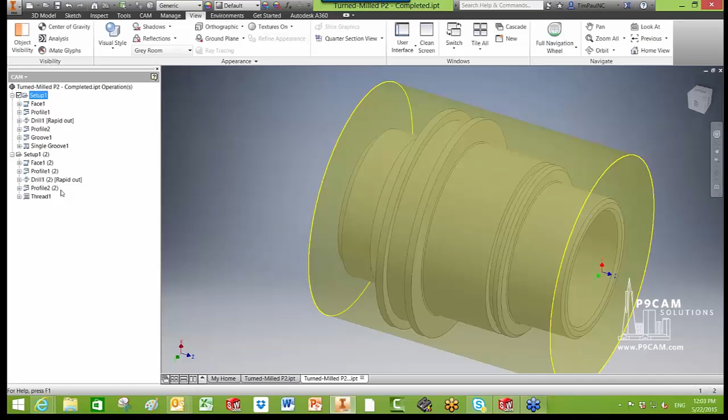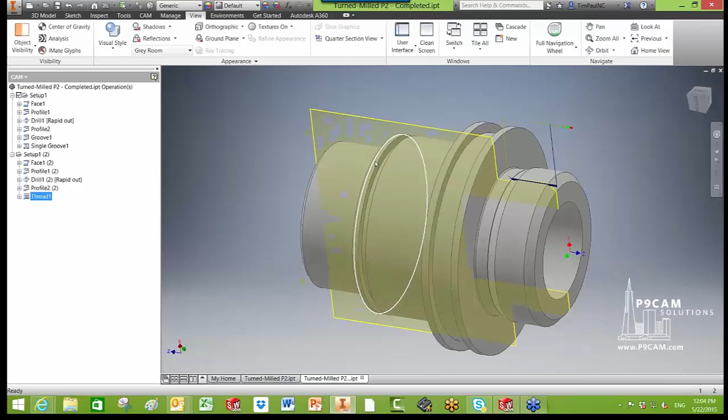So real quickly, I'll give you a quick overview of what we're going to do, and then I'll jump over and we'll work through the actual part. We're just going to do a pretty typical lathe profile, drill, bore, and then I'll show you a couple different ways to do some grooving. We'll get over to the second operation, and we'll show you how to do the same thing, but also add a threading there. So the first operation, I'm going to turn it past the shoulder, and then we'll flip it over, grab it in some jaws, and do the second operation.

So with that said, let's jump over to this part, and we'll jump right into it.

The first thing we're going to do is come up to the setup here. If you're in the model, you jump over to the CAM, and you come up and set up the part. So we're going to set up the first operation and work through these questions. The normal tabs, you just start here and go over and answer the questions you need to answer. We're going to start by selecting turning as our job. We're going to have it in the primary spindle, and we look out, and the gnomon's kind of where we want it. So the work coordinate system is centered, and the Z is facing the direction we want. If we wanted to flip that, we can just hit this and flip it over to the other side. For now, we're going to leave it because it's where we want it.

Then I'm going to come down here to the model and select that so it knows this is what we want to end up with when we're all done. I'm going to come to the stock tab here, and it defaulted to fixed size cylinder, which is actually what I wanted, but you can see there's a lot of other options. I know the bar stock that I have is 3 3/4 diameter, and I want to start with, let's say, 4 1/4. If we wanted to position this offset from front, center, or back, we could do that too. I'm going to leave it on center.

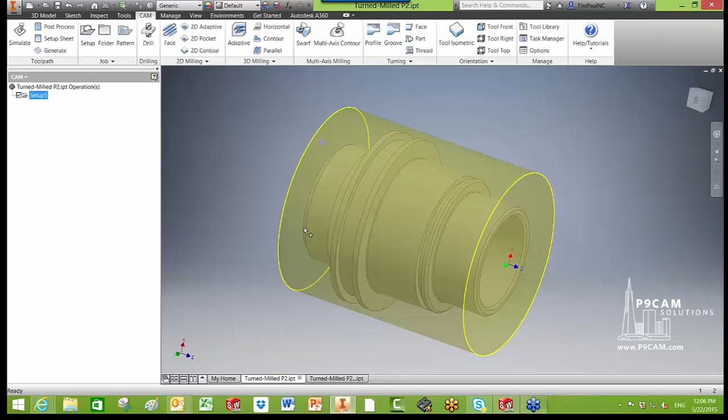Now we're ready to start cutting. If you click here, it shows you your stock. You have some extra material here, some extra material to cut off the front. So generally I'm going to come in and face the front off first. You could come up to turning and grab the tools out of here. I've gotten into the habit of just right-clicking in this gray space and doing a new operation, turning operation, face. If you guys hear me talk much, you'll notice that I count my mouse clicks and try to reduce my mouse movement as much as possible. So that's a good little efficiency trick. I'm going to click on face.

Same thing with these 5 tabs, you just got to go through and answer some basic questions. I think about it as wanting to answer the least amount of questions. So we're going to grab a tool. Here's the tools I have in this library. I'm going to grab this one, that's going to be a good face tool. I'll hit select. You can see it's already coming down, doing a one pass. I want to do some multiple passes, let's say 3 passes at 30 thou.

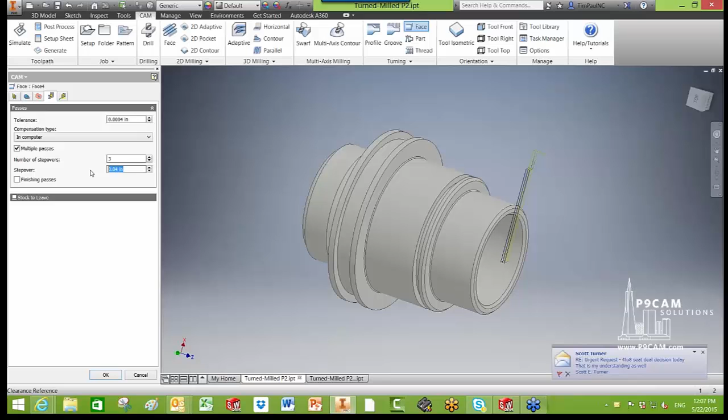Let's do a finish pass too, at 10 thousandths, and hit OK. Like I was saying before, I try to get as few questions as possible, so you can see I didn't go through all the tabs. I start with, like Derek always says, throw the toolpath out there and see if you like it. That's exactly what I wanted right there - a few passes and a finished pass.

So the next thing we're going to do is profile the outside, and I want to profile it a little past that flange. I'm going to right-click, New Operation. Actually, I'm going to close out my Outlook here real quick, I think I just saw a pop-up.

So I'm going to do new operation, a turning operation in profile. I think I want to use that same tool, so it auto-selected the last tool I had. I'm just going to hit OK and see if that gets me what I want. Actually, I know it's not, but I wanted to show you, kind of back into it. I didn't want to go all the way here, and I don't want it to try to groove these, so I'll show you how to get rid of that.

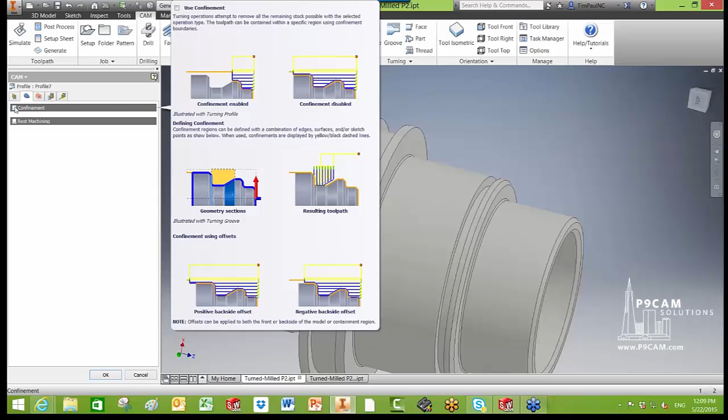We'll go back in, right-click and edit on that profile. Right here where it says Allow Grooving on your tool tab, we're going to get rid of that, so it's not going to let it come down into these grooves. I also want to set a confinement - if you hover over this it'll explain what a confinement is. I'm going to click on that and tell it I want to machine from that face to that face. Like I said earlier, I actually want it to machine, say, 100 thou past the back, so I'll type 100.

Let me see if I have any questions coming in here. Okay, so I'm going to hit OK there, and that's what I wanted. I didn't want it to dip into here, I wanted it to machine past there.

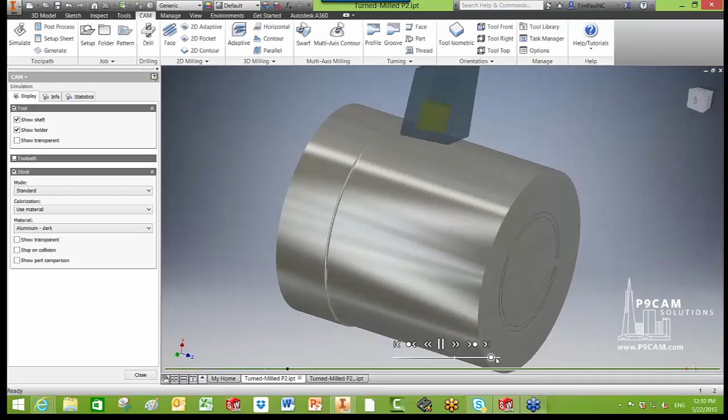So now's probably a good time to do a first simulation, make sure we're on track. I'm going to do simulate. You can turn on your stock - I like to use material, looks nicer. We'll speed that up, just kind of make sure that's what we want to get. So that looks like the part that I want, so I'm going to hit OK.

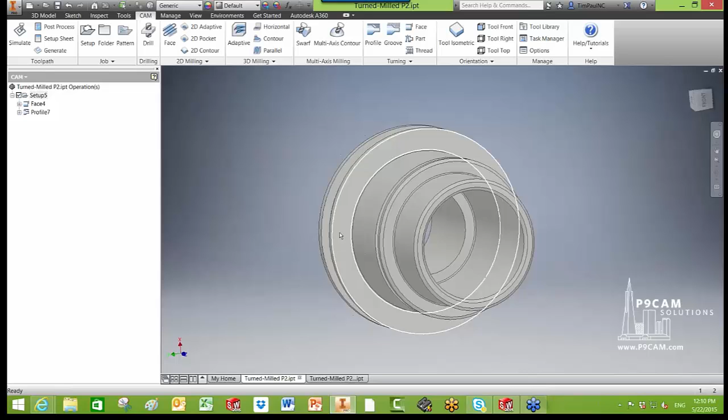And now what are we going to do next? I want to drill, take a big 1 1/8 inch drill and drill this out so I can get my boring bar in there to bore down to that shoulder. So we're going to right-click, Edit, New Operation, Drilling Operation, go to Drill, Tool. You can filter by diameter if you want. I know I'm looking for this guy right here, it's a big flat drill, like a U-drill or something like that.

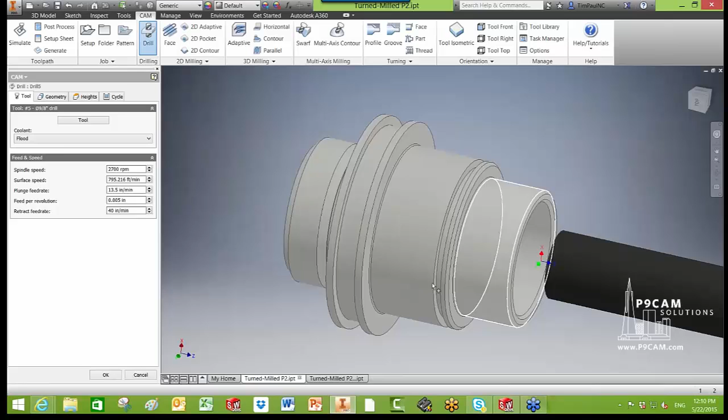I'm going to come over to Geometry and just select the wall of that geometry. By selecting the wall, it helps you define - if I do merge hole segments, it'll take this chamfer into consideration, so it's not trying to go into the beginning of this wall right here. So we're going to merge hole segments. On the Heights tab, I'm going to go to the bottom of the hole, and I actually want to drill past that by, say, 200 thousandths, so I have some room for chips to bounce around in there.

And on the drilling cycle, I'm going to pick just a chip breaker. The chip breaker is going to take these 280 thou pecks - I actually want to make that a little bit smaller, so I'm going to right-click in there, edit the expression, and make it, let's say, 10% of that tool diameter.

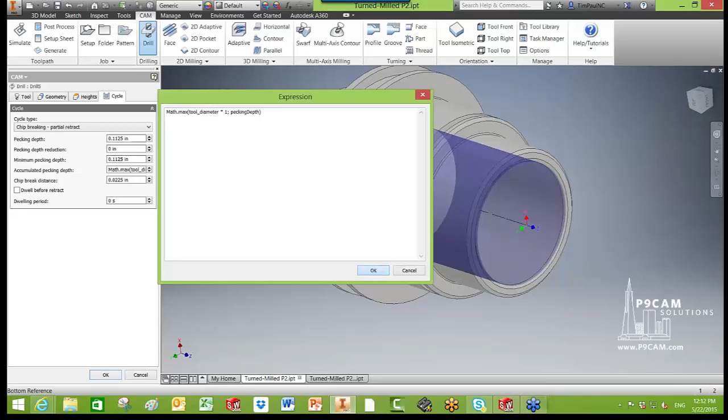I want my tool pecks to be, yeah, that's about right. And then the accumulated pecking depth, every time it comes to remove the chips, I want that to be a little shallower too. Every time it reaches the tool diameter, I want it to come out. So I want it to make 100 thousandths pecks, and every time it gets to 1 1/8 inch deep, it's going to retract and pull all the chips out. There we go, so we got a good drill.

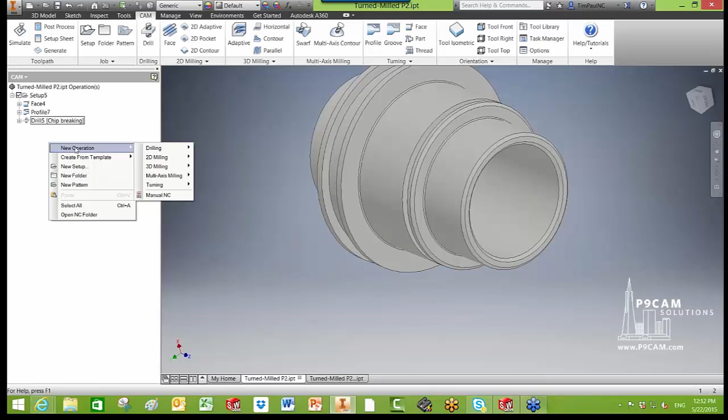Now what do we want to do? We're going to get in there and bore that out with a boring bar. So we're going to right-click Edit, New Operation, Turning, and Profile. You can see here it's trying to auto-select the last turning tool I used, so I want to grab a boring tool instead, this one right here. Click OK.

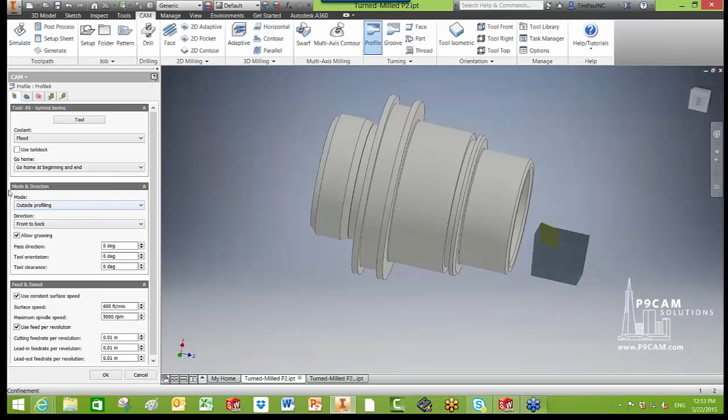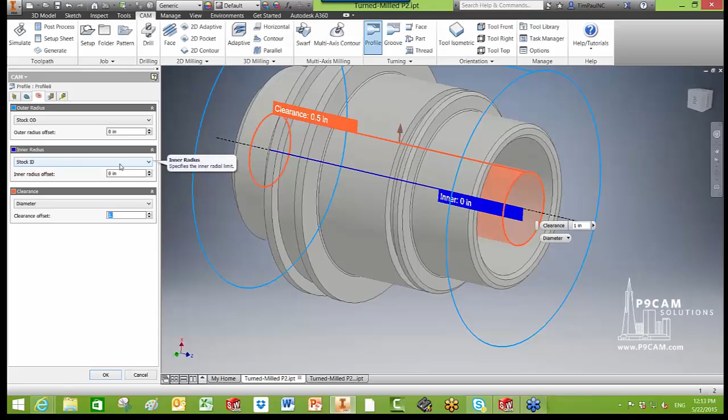The key here is that we want to tell it we're not doing an outside profile, we want inside profile. So on confinements, you want to confine it from here to that shoulder. Then here we want to start with our clearance height. We just drilled a 1.125 inch hole in there, so I actually want to set my clearance diameter to 1 inch, so that gets us in underneath the hole we just drilled. The inner radius is where it's going to start cutting, so since we drilled a 1 1/8 inch diameter hole, I'm going to make that 1.125.

The outer diameter is where you want to finish the cut, so I'm going to just do a selection and grab that wall right there, because that's the final outer diameter I want to cut. In our passes tab, everything looks good. We're going to make 40 thousandths passes, and we're going to have one finish pass. So hit OK, and like Derek always says, see what you get.

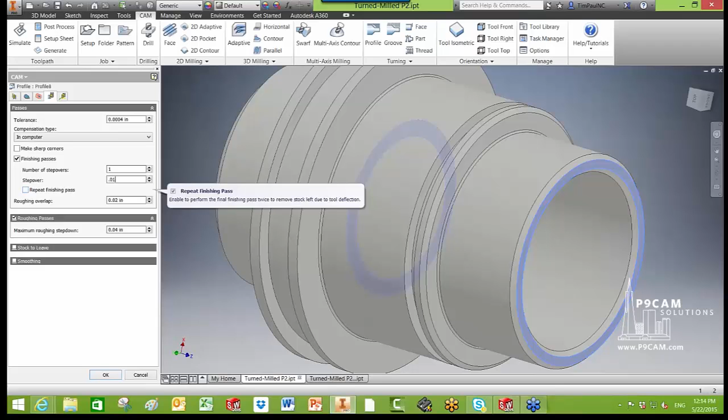See if that's what you want, and that is what I want. Actually, I would change that - let's make our finish pass 10 thousandths instead. So there you go, now we have that.

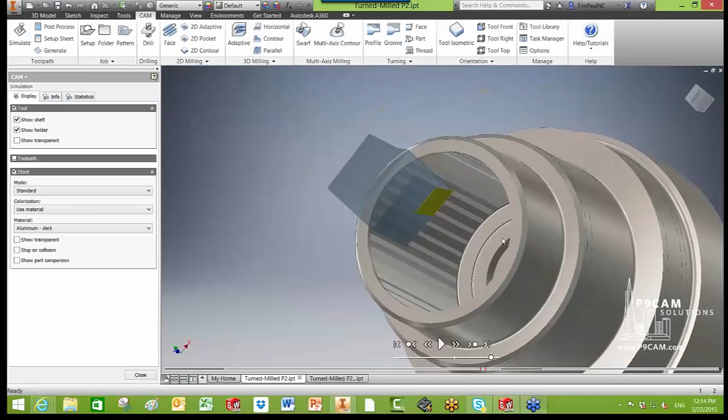Now we're going to simulate it one more time. It's kind of how I would work through it - I would do a couple, simulate, do a couple, simulate, making sure everything's going the way I'd hope. It'll tell us if everything's working right. So I wanted a little bit of a clearance hole in there from the drill, and the bore came through there and did what I wanted. So looks like we're good, so hit close.

Now we got some grooves we got to make before we head over and do the second operation. First I'm going to do this seal head groove here, so I'm going to hit New Operation, Turning. There's a couple grooving operations - we're going to do this one because I have an 1/8 inch wide grooving tool, and that's a wider groove than that. So I'll hit Groove, with Tool, this guy right here, hit Select.

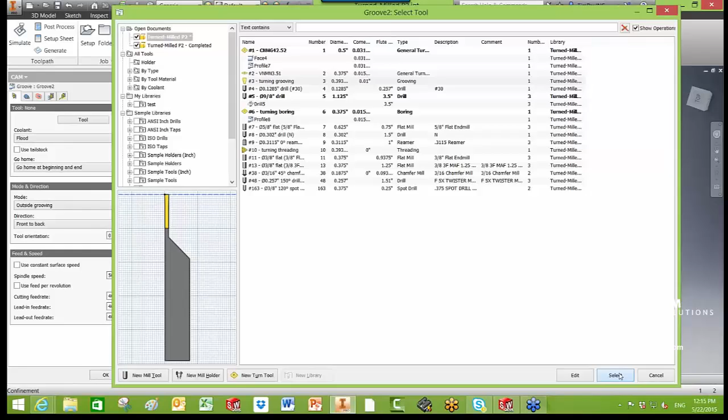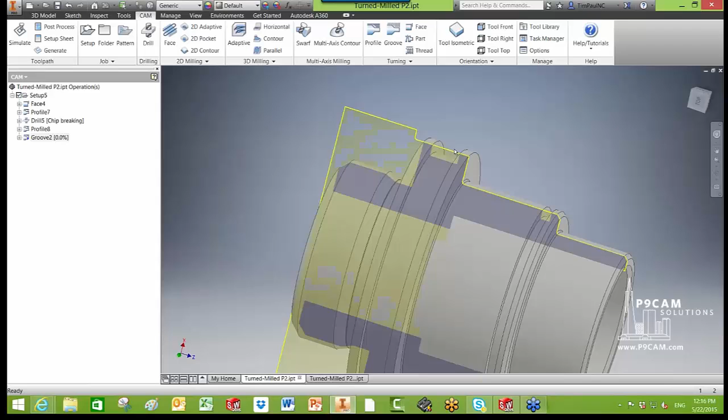We got to confine it because we don't want it to try to groove the whole thing, so I'm going to just confine it between here and here. I'm going to hit OK and see if that gets me what I wanted. Yeah, so it gets me a tool path like I wanted. I'm going to just confirm that we have a finishing pass, so it's going to go in there and rough it, and then go in and finish it. That's what I wanted there.

Now we have to groove this - this one is only as wide as my tool is, which is actually perfect. So I'm going to do a new operation, Turning, Single Groove. It kept my grooving tool in there. I'm going to go to the Geometry tab and grab the front edge line right there, and you see how the tool path put it down the center.

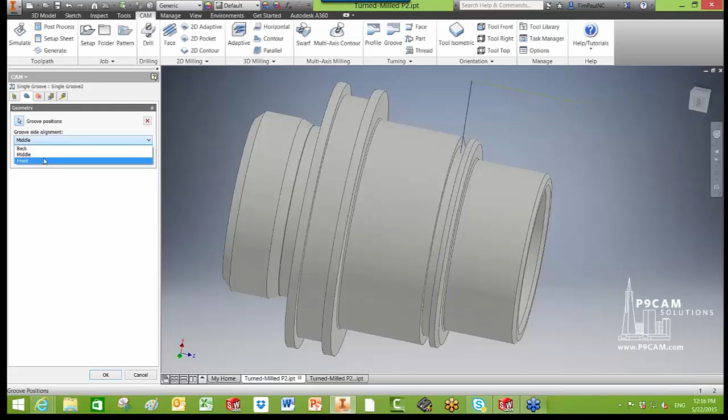When I touch my tool off, I set it off of the front, so I'm going to do that. I'm going to hit OK and see if that gets me what I want.

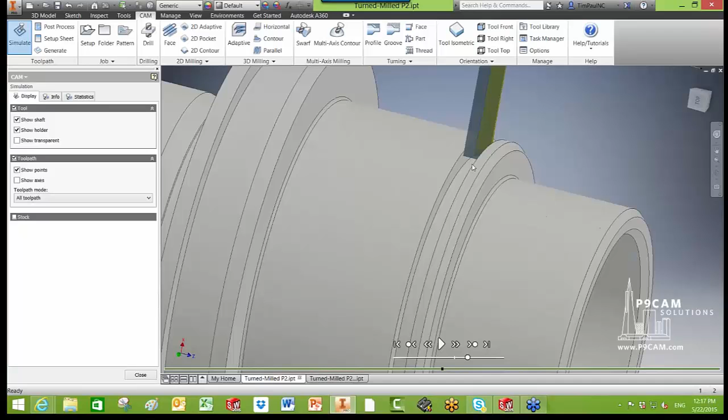Now here's a little trick. If you don't want to go back in and simulate that whole job, you can do simulate, turn off the stock, and turn on this tool path, just showing the points. I can come down here and pick that point, and it'll show you that's what I wanted - I want my tool to come down there and make that groove. So that's a handy little tip, and this comes in handy for a lot of other situations too.

So, I think we're done with the first operation. I'm going to orientate it, and I'm going to simulate it.

Pick that up and hit play.

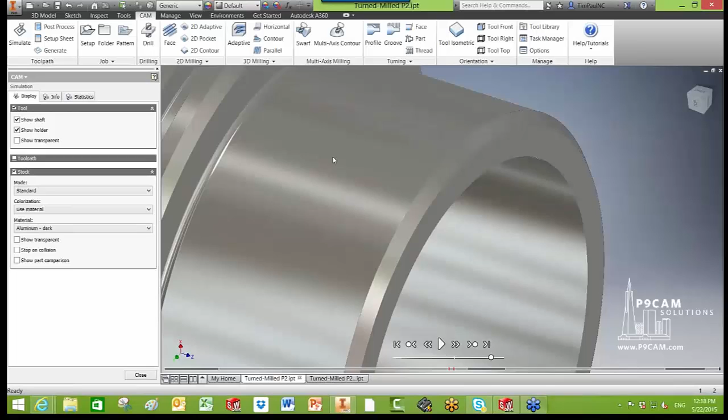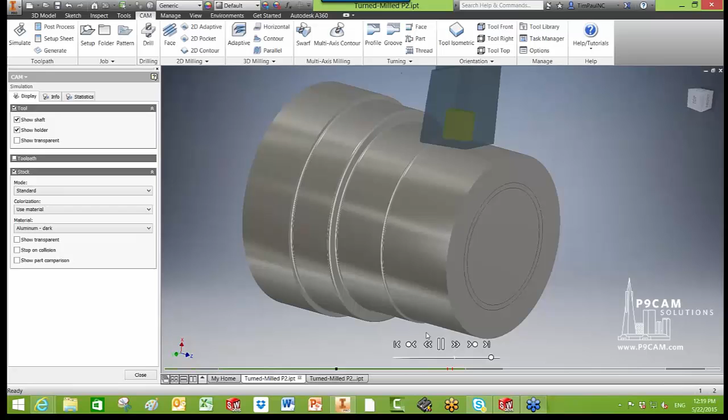I'm going to simulate that again and see how this live TV works. Yeah, no that's perfect. So we get to see how we do it. Now I wonder, can you just try that one more time - what happens when you just select the edge that defines the outer edge of that chamfer? Would that give you the same result? Great, we're going to find out.

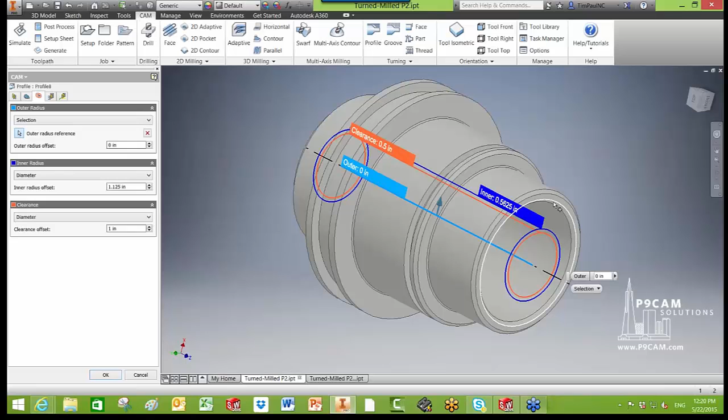So this is a new tab for us. Yeah, I like this - so what happens if I grab that? I didn't define it. Sure seems like it should. I'll play with that, because that sure should let it just grab out there, but you see this didn't move - we wanted that to move with it, and it didn't. So I have to get a hold of the development team, or maybe I'm doing something wrong here. Well, I know that Brian and I were on a screen share yesterday and we were occasionally having trouble selecting from there, so there may be something we're still going to work on.

Yeah, great, so it looks like that solved that issue. You have any other questions? So far, so good - no, it looks good.

Great, so we're going to move over to the second operation here. Now we're going to, as we already saw with this profile, machine past the surface. Now we're going to hold on to this big surface with some jaws. We're going to machine up to this surface, and we're going to put that 2 3/8 by 16 thread on there. So we need to make a new setup for that.

We could go in and do the setup the same way we already did, but knowing that the stock and the model and all that is where we wanted it, I'm just going to come up here and hit Control D, or you can right-click and duplicate that setup. All we have to do here is come in and edit the setup. So now we want to flip the Z over to here, so what we're going to do is hit Flip.

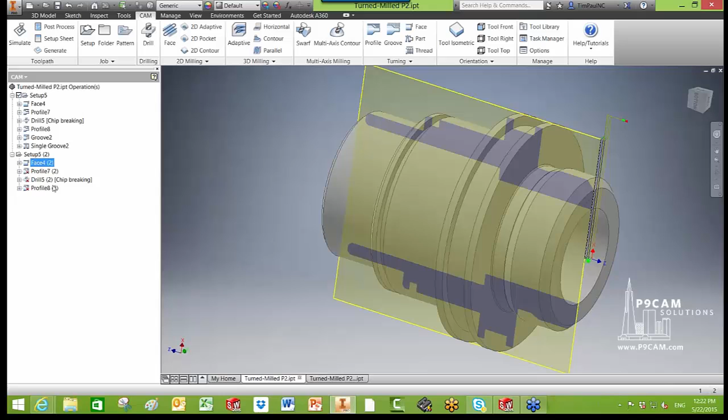With the profile, I think we should be able to get away with just redefining from here to here, making that 0 for the confinement. Hit OK and see if that gets us what we wanted. Yep, that's what I was hoping for.

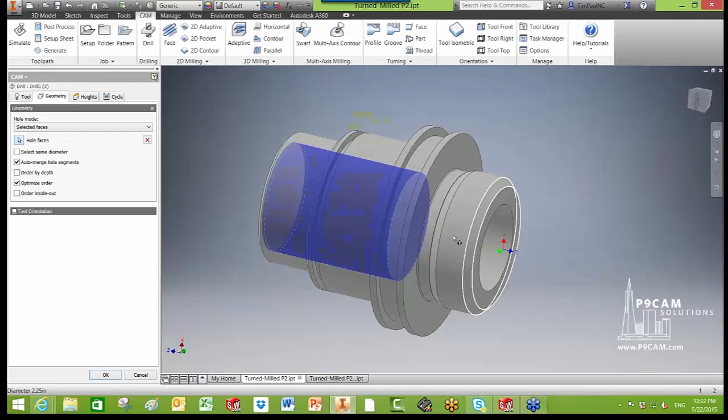Drill - we want to use that same drill to come in here, now drill past that shoulder. I'm going to cancel out the geometry I selected, and grab that hole, or that wall. I do want to drill past the same amount, so I'm going to hit OK. So we kind of quickly just made that hole.

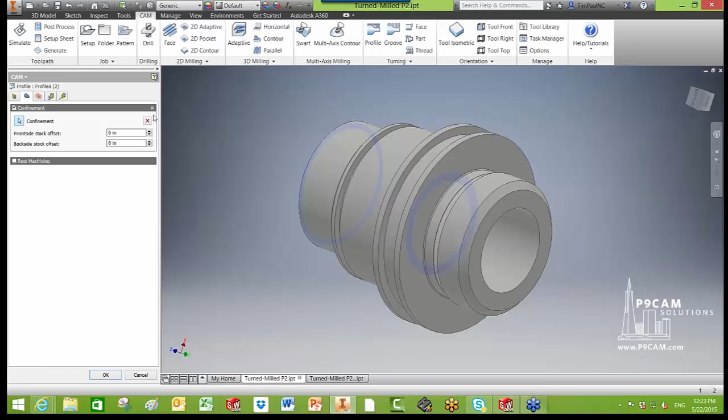We want to use the same tool to bore out that bore. So for the confinements, I'll pick here, and then I'll flip it over and pick there. And then let's bore past the back by 100 thou. Hit OK, see if that gets us what we were hoping for. It did.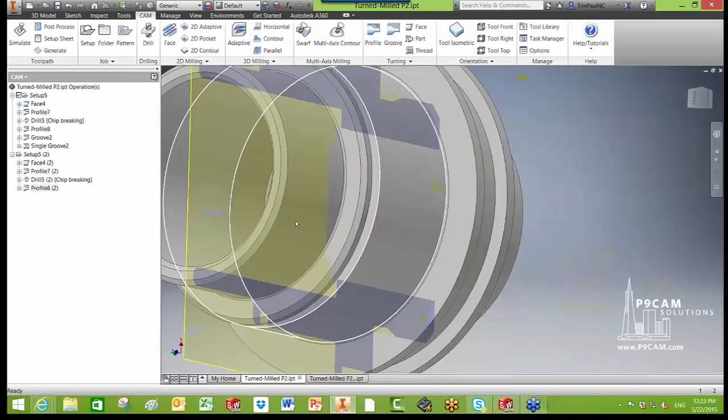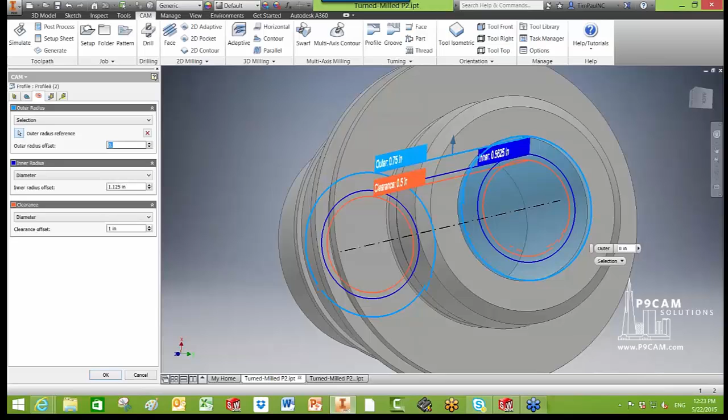Actually, if we look in here, the passes tab, our outer diameter really should just be that wall, right? It should be 0. That's far enough to see that it was a model. So we had it bigger, and it only machined out to the model, but I'm going to redefine it as that wall. That gets us that.

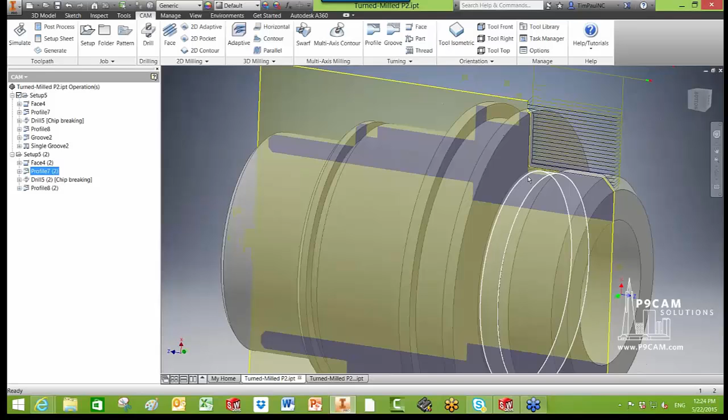And so now we're going to have to profile this outer profile, right? We didn't make this little groove here, so we can give some relief for the threading.

I'm just going to pick another tool that I can do that in one pass with one tool. I'm going to pick this tool because it'll get down back there, and then I'm going to allow it to groove. Before I showed you how to turn the groove off, I'm going to allow it to go down in there.

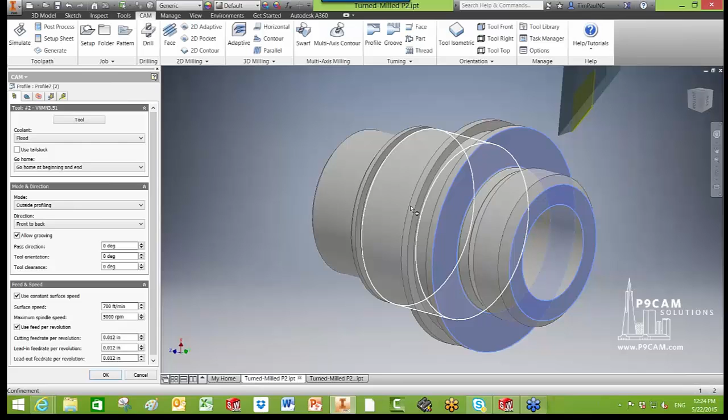And see if that gets us what we want. Yeah, so now we got down in there and come off. That's more of what we want before we go into threading.

So let's simulate it real quick before we get too far ahead of ourselves. I'm going to hit Control Select, holding Control, and select both of the jobs, or both of the setups. I'm going to hit Simulate, and we'll do that.

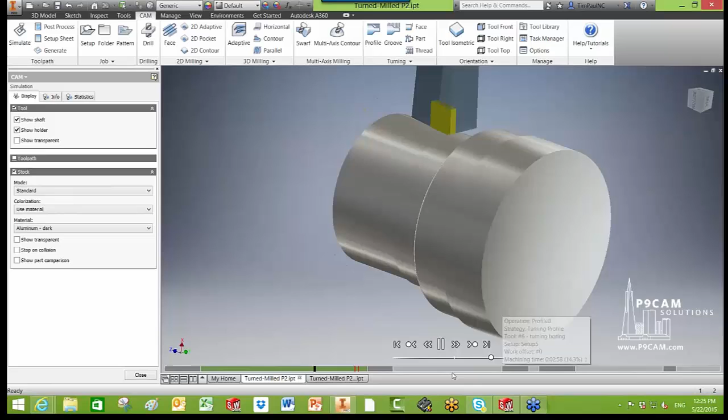Looks like we're ready to thread. Made pretty quick work of that. So let's throw a threading operation in, looking at my notes to make sure I didn't miss anything else real quick. Yeah, so we're ready to thread.

So we're going to go New Operation, and use a turning operation. We're going to do threading. Obviously, we need a threading tool. So I have this threading tool right here, a single point threader.

Oh, you know what? Did you guys see how that stayed over there? I'm going to hit cancel because this is a good point. Because I just duplicated that, if I would have started a new setup, it would have made it the default. But if you see this checkbox up here, anything new you add is going to add what's the default. So if you left click on this, then right click, you can either hit Shift D or you can just change that to your default.

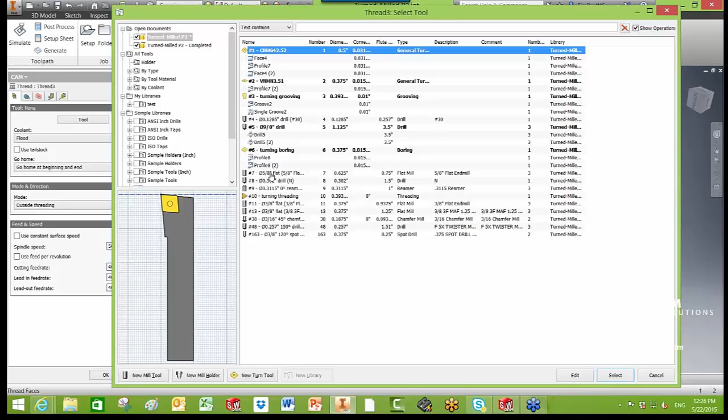So now when we add a threading operation, it's going to add it to the second operation. I'm going to do a new operation, go back to that, do a new operation, do a turning, come down and do threading, and then grab that threading tool. And see, now you see it on the correct side.

Now we're going to go into the Geometry tab, and in the Geometry tab, I'm going to click this surface because that's the surface that I want threaded. Then we're going to have to do some confinement changes because I don't want it to lead off that much, and I actually want it to go past this backside.

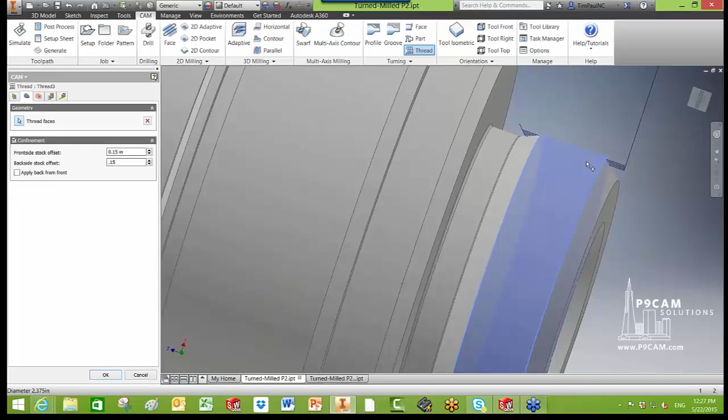So this default, not really sure where it came from, but we're going to type in, we'll start with 150 in front of it, 150 behind it. Yeah, that looks like what I want. The bottom thread still gets past it. I might do 175.

I'm going to hit OK. And no, I'm getting ahead of myself.

So we have to define the thread depth, and this is where you're going to find some info in your machinery's handbook. We're going to do 37 thou deep, and our pitch, because it's 16 threads per inch, is going to be 0.0625.

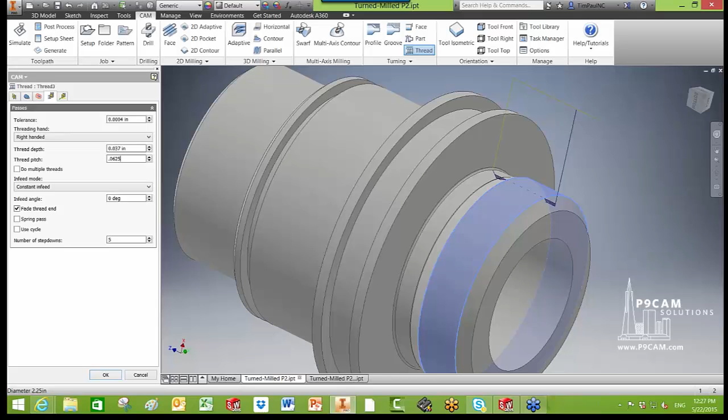Take a number of step downs. Let's make that 3 and hit OK. So I have 3 step downs.

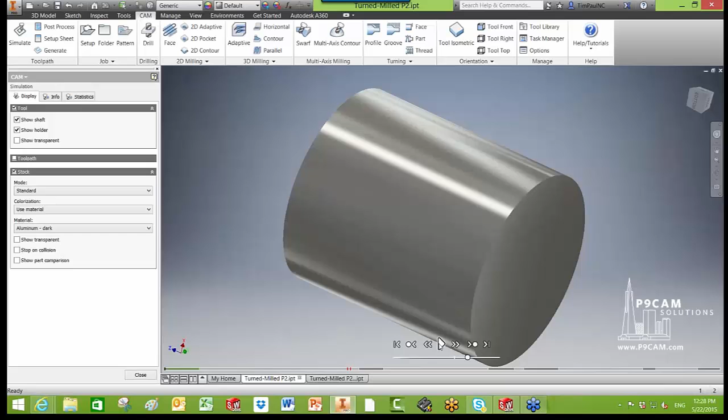Looks good. So control, select those. We're going to simulate it one more time. I like to speed it up because I just really want to see if my end result is what I wanted, and it looks like that's what we want right there.

Do we have any more questions? Did I race through that too fast, Derek?

Yeah, hang on, I was trying to turn on my mic. Yes, you raced through that too fast, Tim. So now that we see that you can actually program a part like that in 28 minutes while you're talking, not bad. Yeah, it's a quick program there. No, it's perfect. Okay. Yeah.

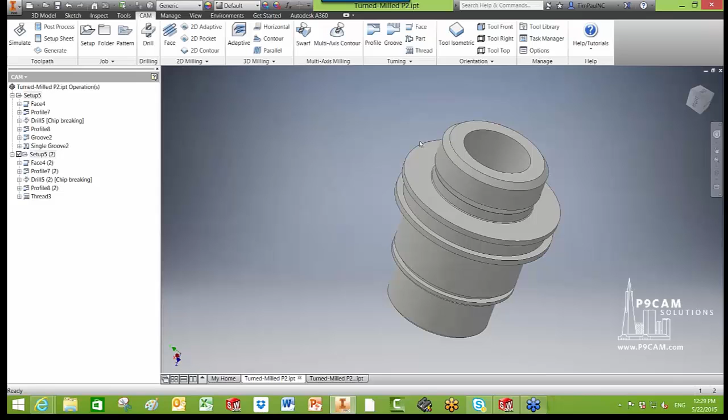You know, what I can do while people are asking questions is I recently had people ask if in the same workflow you can go right to a milling. You know, so let's say we had some features out here, which we don't on this part, but you know, a lot of guys don't have live tooling lathes. So I was just at a shop where they would do a lathe part, and then they would have to jump over to a whole nother setup and run, you know, milling.

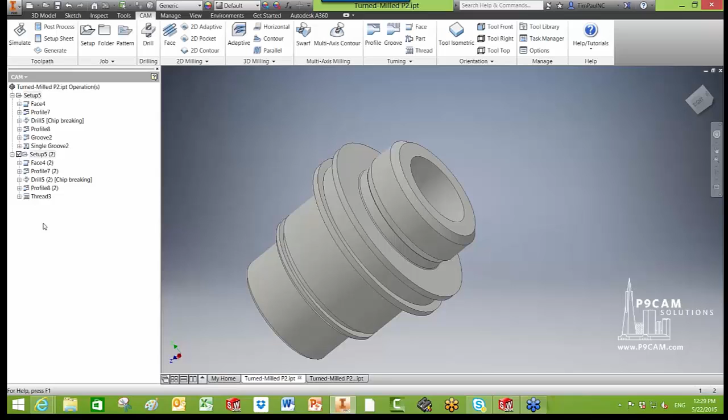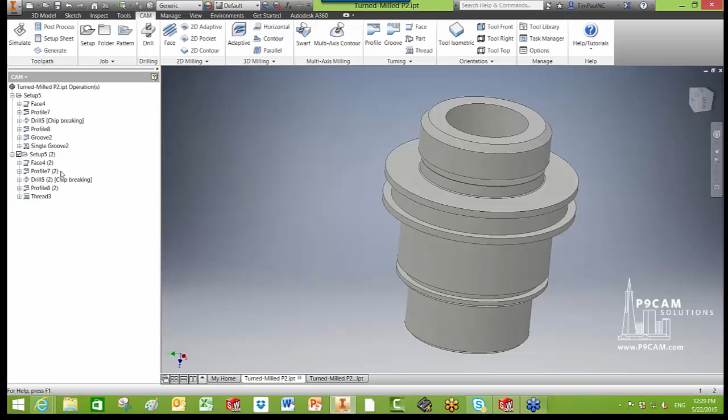Well, right here, all you have to do is just do a new setup, and you can go right into milling. So you just set up your part the same way we just set it up, but you would just pick milling, and then you would go through and define your milling operations. So it's nice that it's all in that same workflow. And if you do have live tooling, then you would just program it basically like a mill inside your mill-turn setup. Right, perfect.

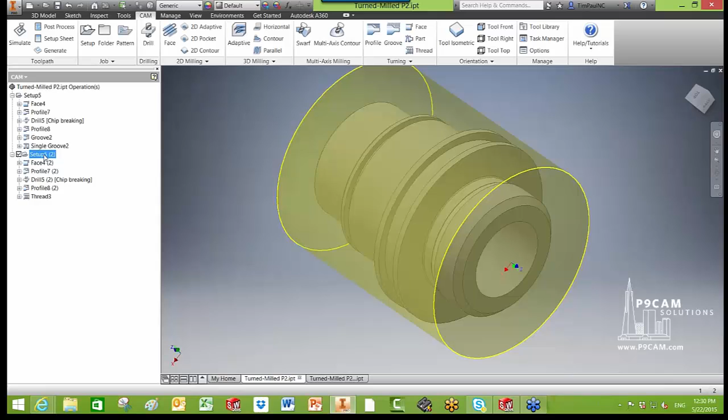Well, here's one question, and I'm not sure of the answer to this yet either. In the new Inventor HSM lathe product, do we have the compare function under stock simulation? So I failed because in my notes, I'm sure that I had -- let's simulate this first job. This is a tool that I use all the time.

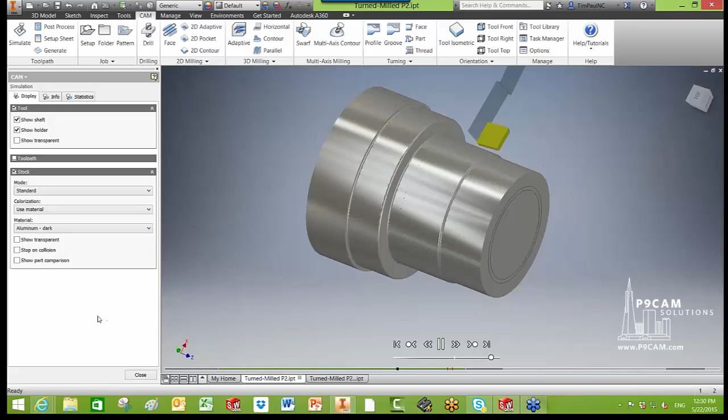So we're going to orient that and show part comparison, and stop me if I'm thinking of something else. But actually what I do is I simulate it, and then I go and turn that on. I see. So then it shows me -- you know, it might have been a better example to simulate everything up to those grooves. But yeah, now you show the part comparison, and it'll show you basically this whole backside needs to be done.

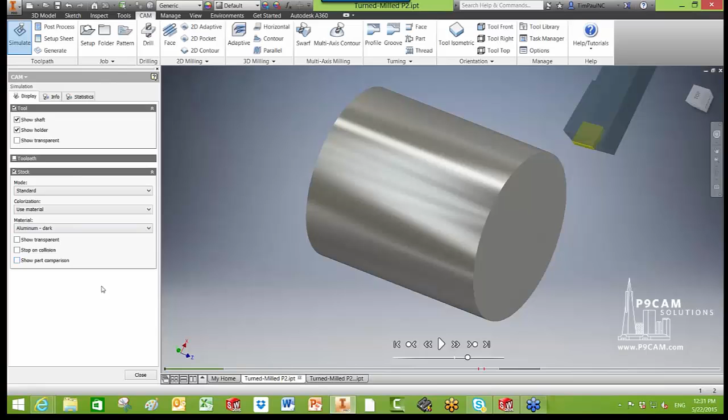What might be a better example is if you were programming down through there and went to simulate and you hadn't done the grooves yet. This is probably more how it's useful to me. You know, so I machine everything. I think I'm doing pretty good, and then I turn this on, and this is where I go, oh man, I forgot this groove here and this groove here.

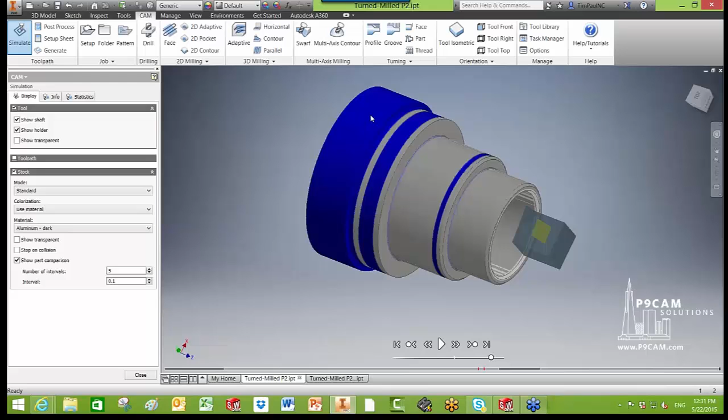So in blue, it's showing, you know, this is still just stock material. You can see the backside is obvious because we haven't machined that in the second operation. But yeah, it works really good.

And that's a good point, because a lot of times when we think of compare, we just think about seeing the gouges on a part if we make a mistake. But sometimes you miss a feature and you forget a feature, and that's what Tim's pointing out right there. So that can really help out, like if you're machining a plate with a ton of holes and you missed a few. Yeah, in my last job we would have so many, you know, 100, 200 features, little tiny features, and it's really easy to forget to come down and do a finish pass on some obscure feature. So that was a good way to kind of root out what you forgot.

Okay, I've got a question here coming in from Brian. I found when I clicked make sharp corners while profiling the simulation, the simulation showed sharp corners, but when I made the part, it actually made a small radius. Any idea what's going on here? The toolpath shows an arc when it starts the cut while finish profiling a face or a body.

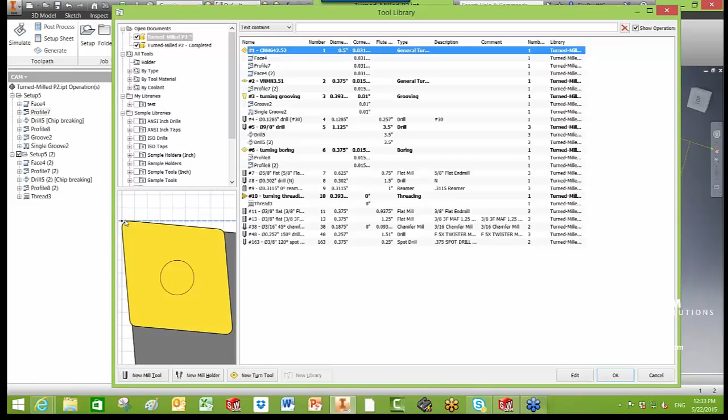Probably best to grab your file and look through it, but I'm going to take a guess. I worked through this problem with someone recently, and I'm willing to bet it's how the tool's set up. So I went into my tool library, and if we go to setup here, it's how this is set up in the compensation. This is driving the tool path off this point, where this straight and this straight come together.

More than likely, so let's have you email Derek the file and we'll work through it. We had a similar issue with a customer recently, and it was how the tooltip was set up. That would really also require some kind of setup on the machine tool controller. Right, so you'd need to put your radius in. It's possible that the radius on the machine controller needs to match the radius on the insert here.

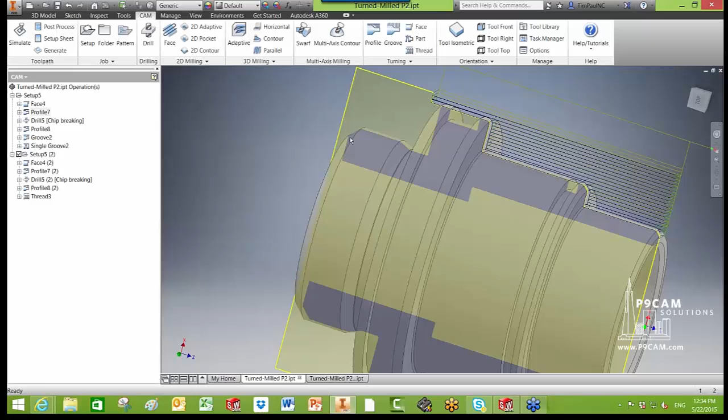If you want to bring that back up, I'm probably going a little off topic, but we could talk about it for a second. So if you bring up that tool profile real quick, I think we're just making a point on that tip tangent. As many of you know, on a lathe you see that intersection point. When you're turning an outside diameter, the radius on the insert does not matter because the insert will clean up. And when you're turning a face, the radius on that insert does not matter. But if you're turning a chamfer or a fillet radius, the radius on your insert really does matter, because that cutting point changes as you move around on a chamfer.

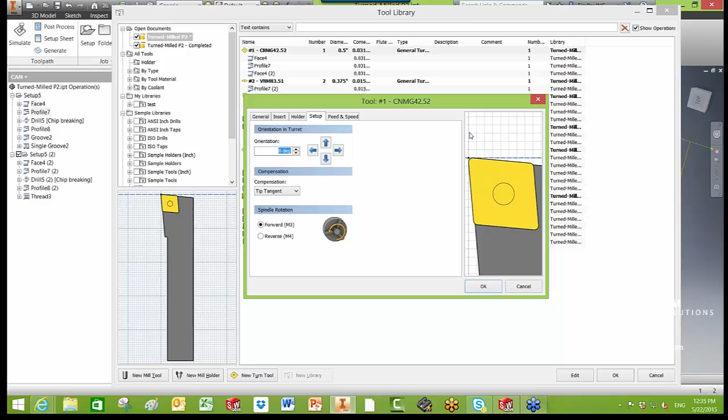So it's kind of to Tim's point there, there's definitely a possibility that the issue is based on the radius of the insert and whether or not that's tied with the radius that is on the machine controller, because on a lathe you will put in your diameter and your Z direction tool length offsets, but you will also enter that tool insert radius into the offset register.

Yeah, explain better than me. Thanks, Derek. It's been a while since I ran a lathe, but I remember it's important. Yeah, same with me, it's been 4 or 5 years or so.

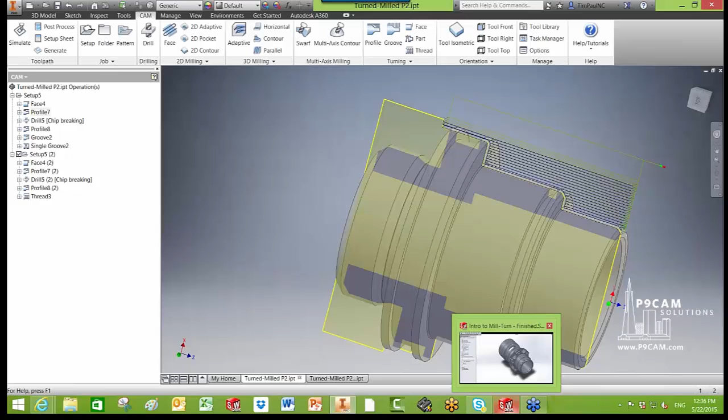Last note, like Derek was saying, I don't have a lot of Inventor turning time. It just came out, and all of these features are very similar to our HSM Works. So if any of you guys are using or thinking about using HSM Works or Inventor, luckily for me and Derek, a lot of the functionality is the same.

How many hours do you think you have so far using Inventor HSM Lathe? My boss would probably like to hear a lot more, but I probably have, let's say 3 or 4, to be honest. It's not as much as I should, but luckily it translates really easy.

I have a little bit more on the HSM Works side. A lot of the features are the same, and there's actually some improvements, like you were saying in the heights tab for the whole piece. But just the naming actually makes more lathe sense than it does in HSM Works. I think they pushed it out to Inventor to see what the feedback was, and I think most people like the heights descriptions better here, so they're planning on pushing it out to HSM Works soon.

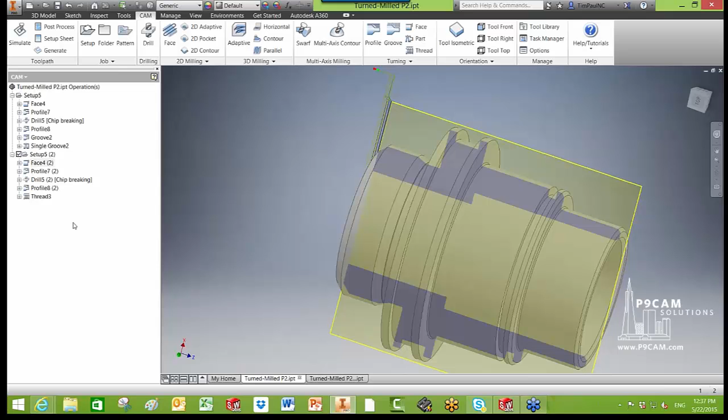Yeah, good, that would be my feedback too. I saw it for the first time yesterday, working with a customer on a program, and I didn't quite get it at first. You kind of illustrated it for me, and I fully understood it once you showed. Maybe you can bring that up one more time, and we'll just go through those three.

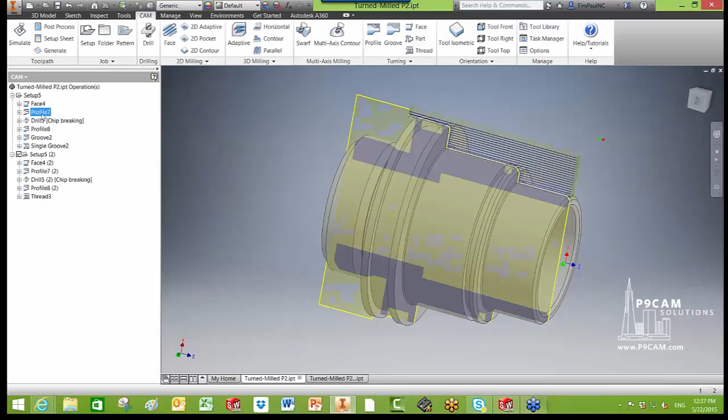I had to learn it the same way, so think about it in our milling context. This should be the highest point, this should be the lowest point. And it's the same way in lathe: this should be further away from center, and this should be closest to center.

Actually, no, it flip-flops for outer versus inner. The inner radius should be the part you're actually wanting to cut down to. The outer radius should be the part that it starts cutting at, and then your clearance should be further away than this.

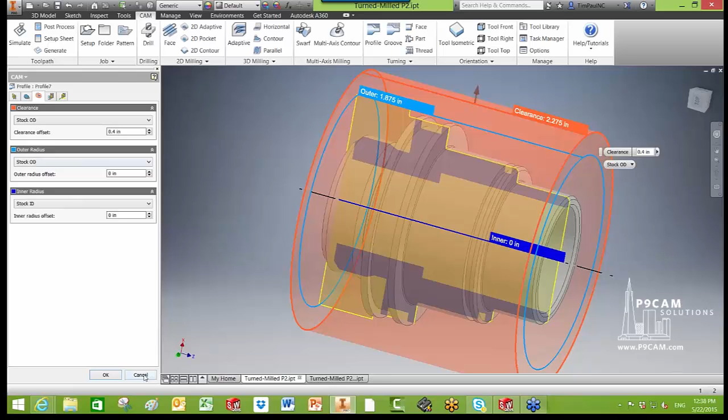If you go to the boring cycle, this is where I just had a customer that got turned around because I think he'd been doing a lot of outside profiling. Well, in boring, the clearance goes to the inside, but it stays on that same trend. So this should be close to center, this should be furthest away from center, and this should be where it starts cutting. So this should be your final diameter, final cut, and this should be where it starts cutting.

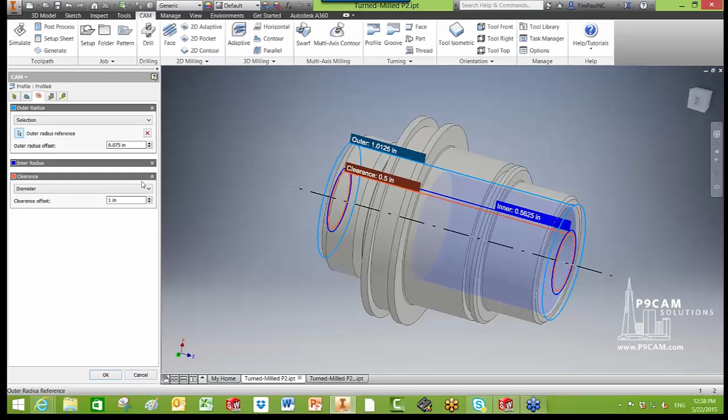Can I explain that? If you click on them again, just to highlight, I like the way we have those highlights. So what's improved here is that they flip it. In HSMWorks, the heights tab is the same whether you're cutting outside or inside, but they've improved this to flip that menu for you when you're boring.

So go ahead and give feedback to the team. I, for one, would certainly love to see this functionality in HSMWorks as soon as possible. Yeah, good.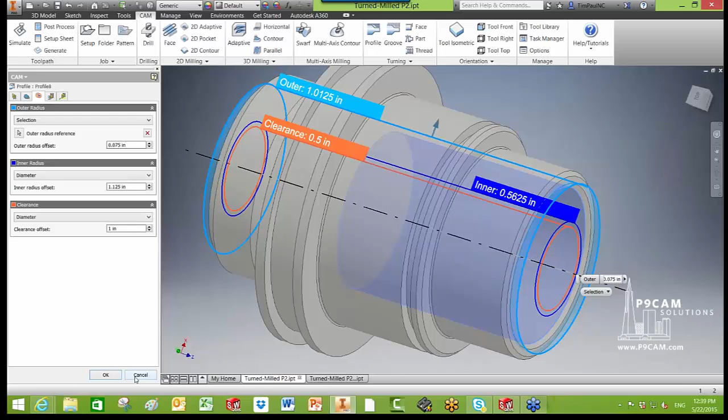One thing I didn't hit on, does anybody have any other questions? No, looks like we're good. So I was thinking, if I have a file readily available, let me just jump into it.

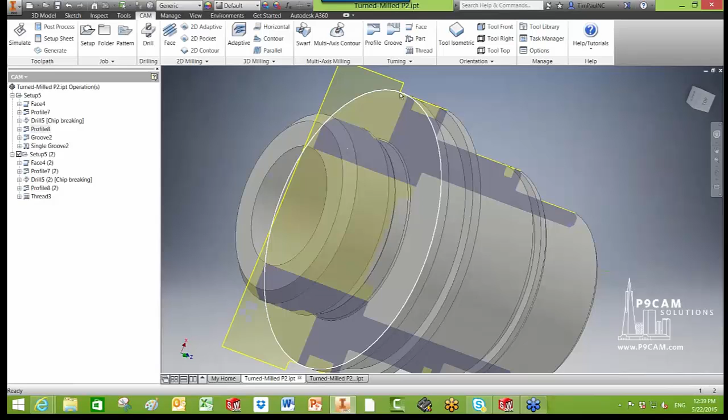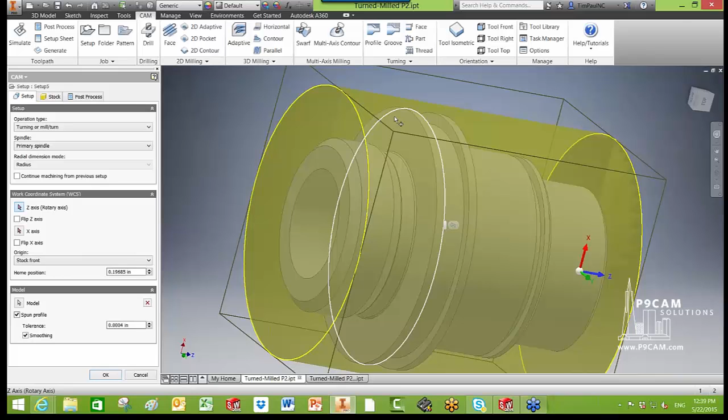If we had a milled profile here somewhere on this surface, and you just want to lathe it and then put it in the mill later, it is important in your setup to click this spun profile. That'll make it only look at the profile that is spun, so it's not going to look at this dip. If you had a milled surface here, it's not going to go in and look at that. I can give you an example of a turn part I was working on.

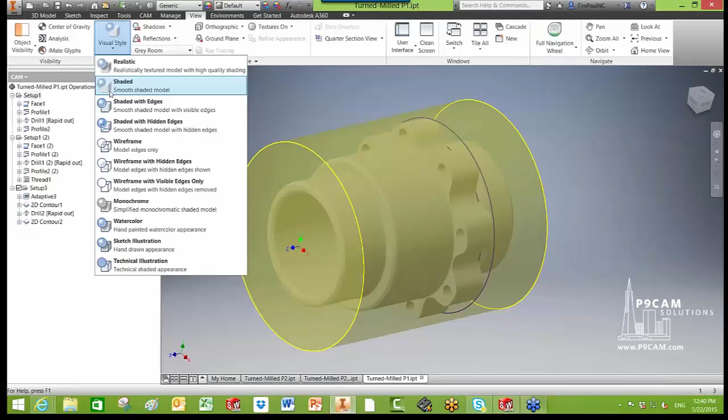Something like this. If you're in the setup, let me make it a little more viewable here. So if you're in the setup, and if you don't turn this mill spun profile on, let's see what happens. You can see this blue outline—it's not all the way up here like it needs to be. So if your profile's cut, you're going to come all the way down to here.

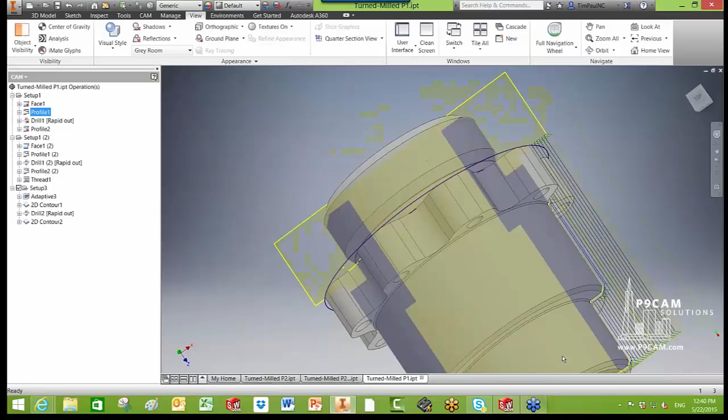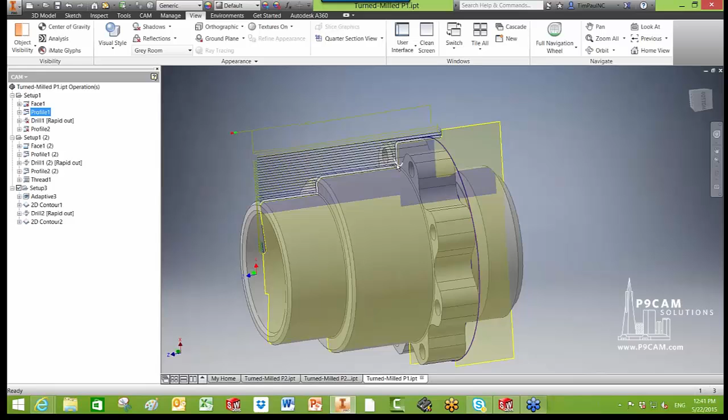So it's a nice little easy feature while you're setting up the job. You just hit spun profile, hit OK, and if we regenerate that toolpath, you can see how this blue cross section actually comes out to the outer diameter—it's like the spun profile. I think the name makes it pretty clear. So if you're doing any mill turn on the lathe, or mill turn where you turn it in the lathe and then go over to the mill, make sure you click that spun profile so you get a good profile for your tooling.

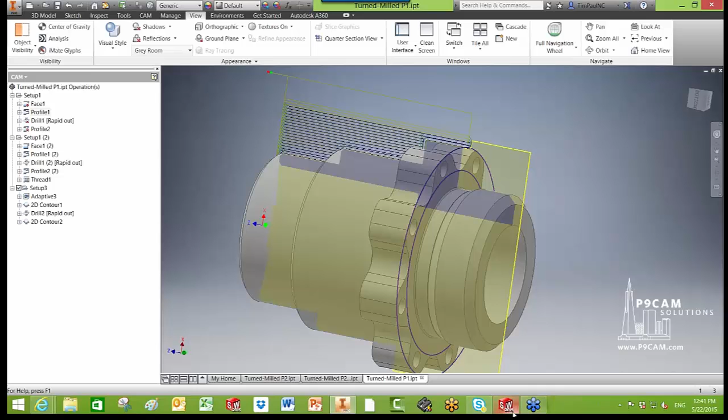Does that make sense? Yeah, absolutely. It's a great feature, it's a better workflow than we had in HSMWorks. And the nice thing here—I don't know how much you've played with it in Works—is that it's all parametric, so if you change this model, the spun profile changes and this will update with that. Whereas in HSMWorks, on a part like this, if we're using a spun profile here and you change the model, the spun profile doesn't change with the model. I see, right.